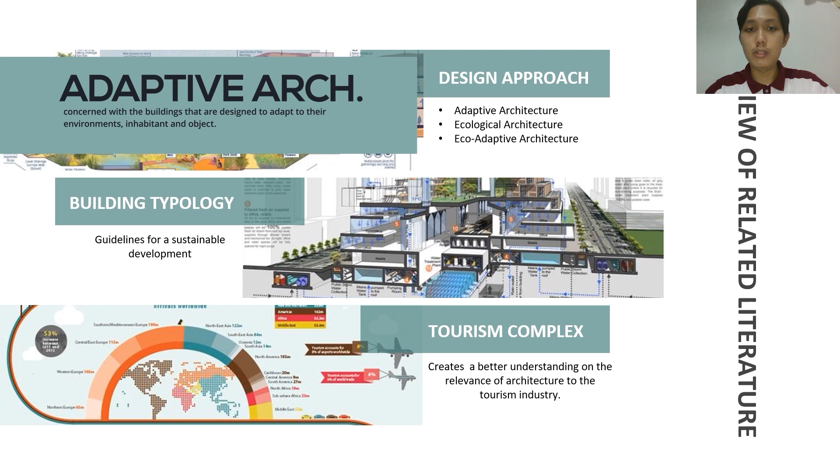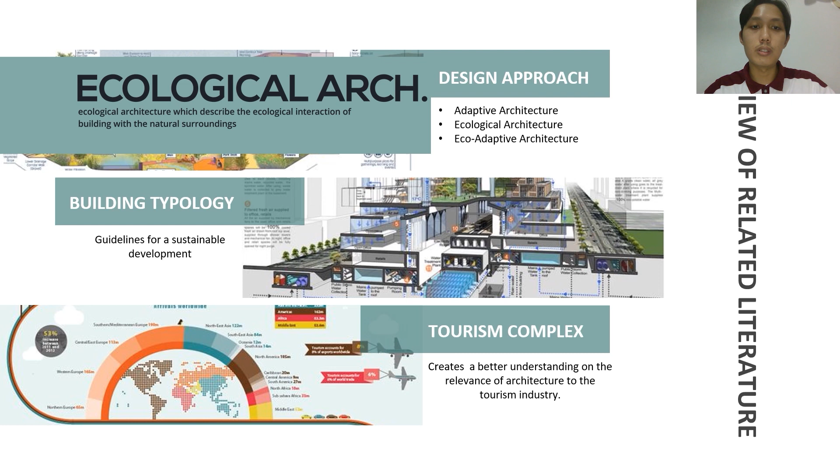The design approach deals with adaptive architecture, which is concerned with buildings designed to adapt to their environment, inhabitants, and objects; ecological architecture, which describes the ecological interaction of the building and natural surroundings; and eco-adaptive architecture, which deals with the cooperation between architecture and the natural environment to adapt to changes in their environment.

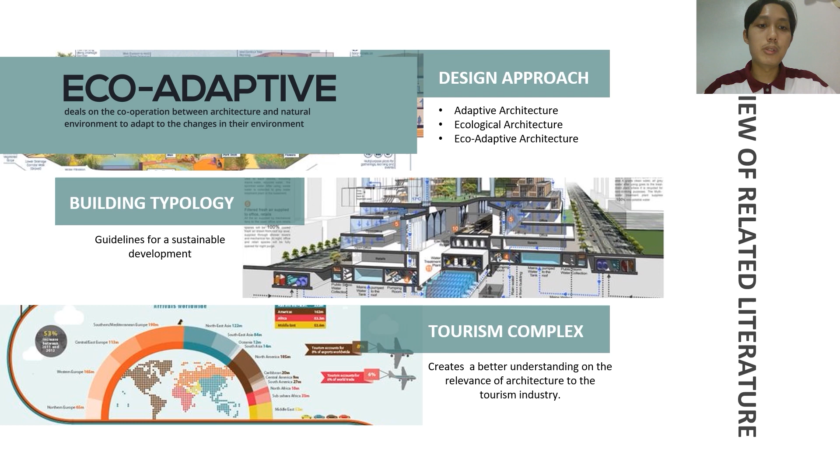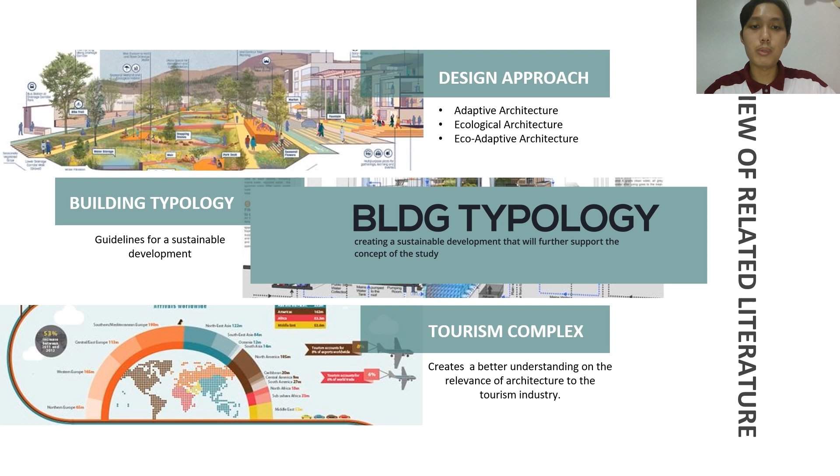Next is the building typology design topics, which are guidelines on creating a sustainable development that will further support the concept of the study. And lastly, the tourism-related topics, which create a better understanding on the relevance of architecture to the tourism industry.

For the local case study, the SM City Clark Complex offers a similar enterprise to the proposal. The development is composed of several buildings, including the Tech Hub, BPO Towers, Convention Center, Hotel, and the mall itself, which is connected by an elevated bridgeway. This bridgeway is used to highlight the landscape and the urban design of the development.

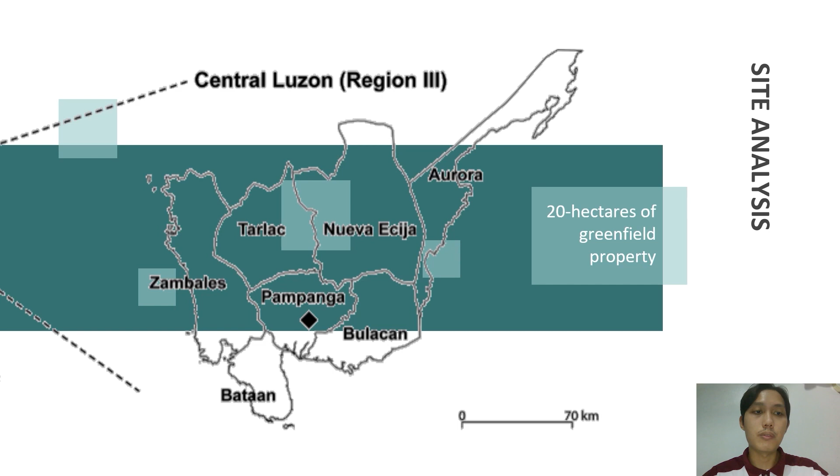The proposed tourism complex will be located in Region 3, Central Luzon, specifically in Mabalacat, Pampanga. The site of the proposed project will be in the Clark Tourism Enterprise Zone, a 20-hectare greenfield property located along the Prince Balagtas extension.

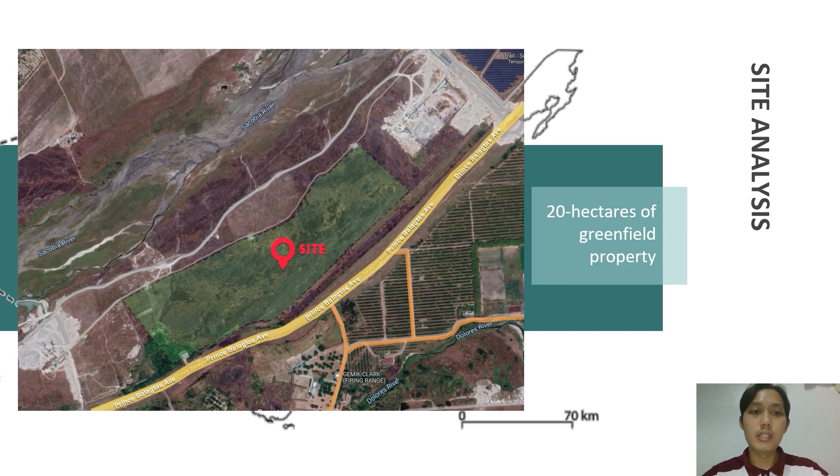Based on the initial analysis of the site, it is strategically located near an international gateway and major expressways, such as the Clark International Airport, Subic Freeport, SCTEX, Clark Railway, and Bulacan Airport.

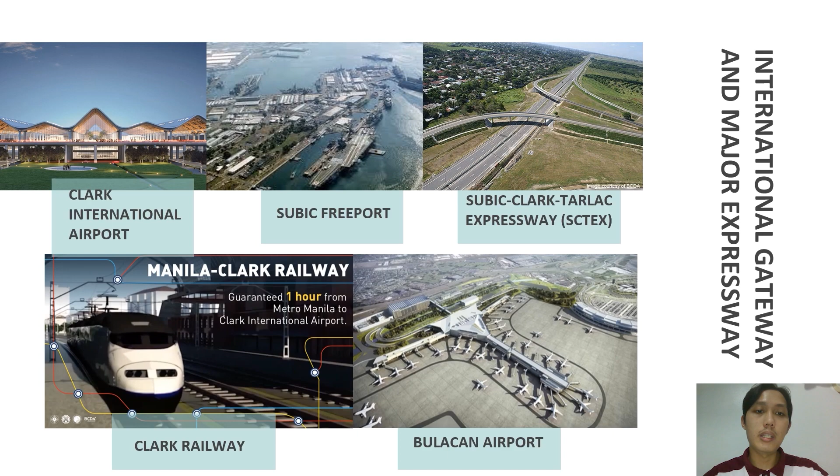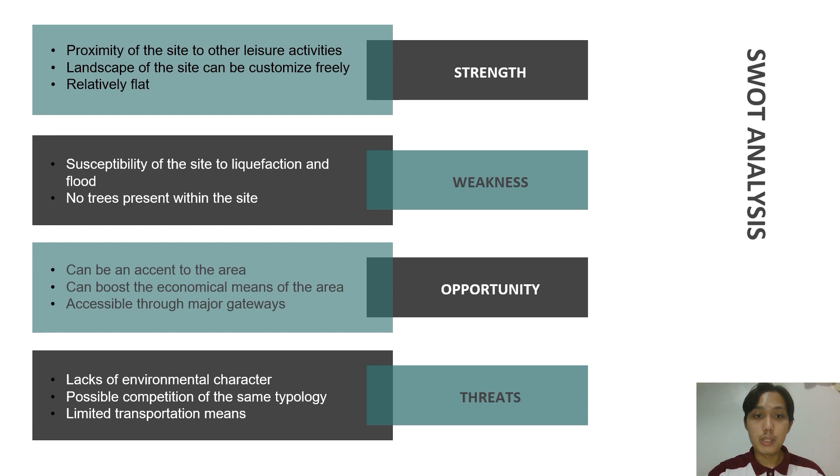The site is accessible also to major gateways. And lastly is the threat, which is the lack of environmental character, possible competition of same typology, and limited transportation means.

Moving on to the environmental system, for the foundation system, pile foundation will be incorporated in response to the natural hazard of the site. Framing system will be long span steel framing to have large unobstructed spaces. Floor framing will incorporate reinforced concrete.

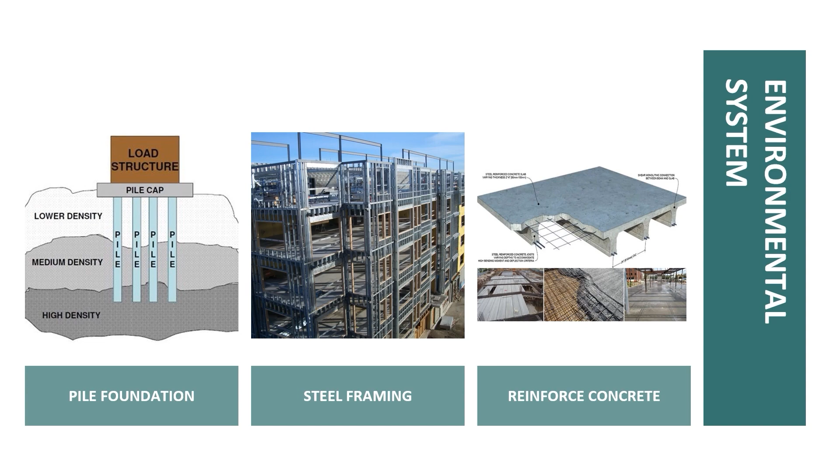For the electrical system, it will be provided by the PELCO 2. Alternative power supply like emergency power supply system and solar panel will also be incorporated to the development. In the mechanical system, centralized air condition and split-type air conditioning unit will be incorporated.

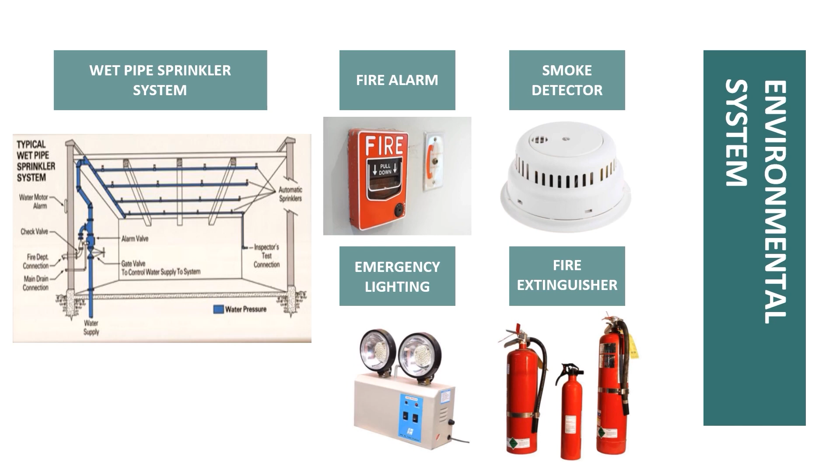For the firefighting system, it will be the wet pipe sprinkler system along with other firefighting components like fire alarm, smoke detector, emergency lighting, and fire extinguisher.

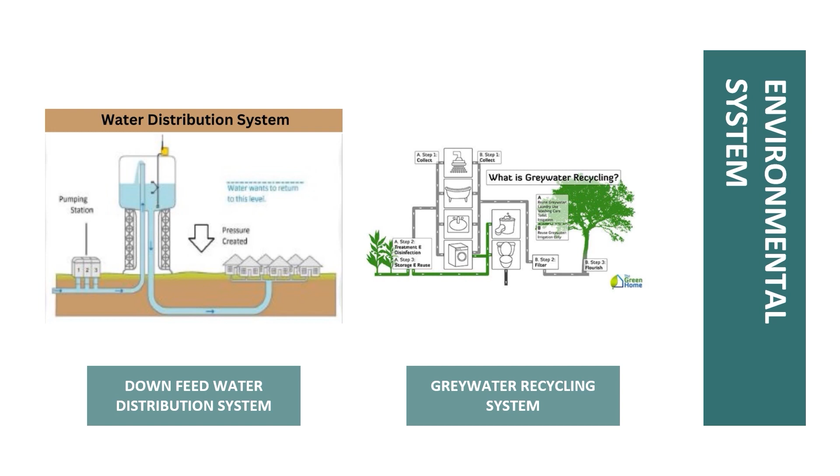For the sanitary system, it will be the down feed system for the water distribution along with the gray water recycling system. In sanitary drainage, the development will incorporate a 3-chambered septic tank, and for the storm drainage, it will be the rainwater harvesting system, permeable pavement, and vegetated swale to reduce the storm water runoff and increase the environmental quality.

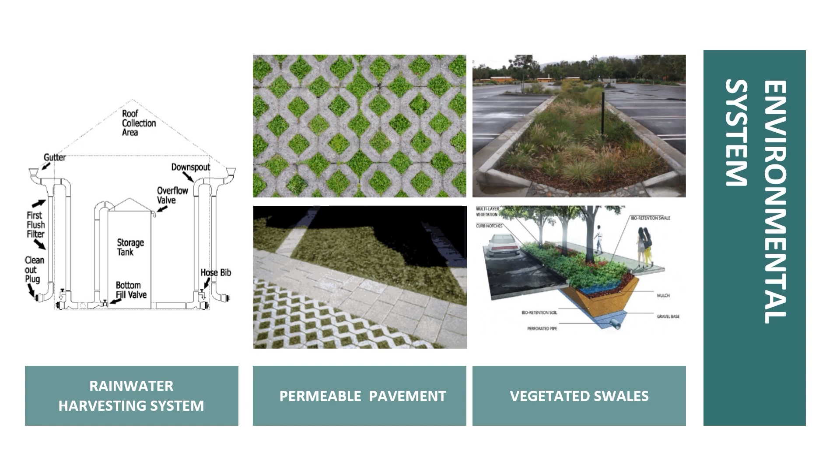For the waste management, waste handling and segregation will be incorporated to achieve a healthy and sustainable development. And for the security system, CCTV will be incorporated to the development.

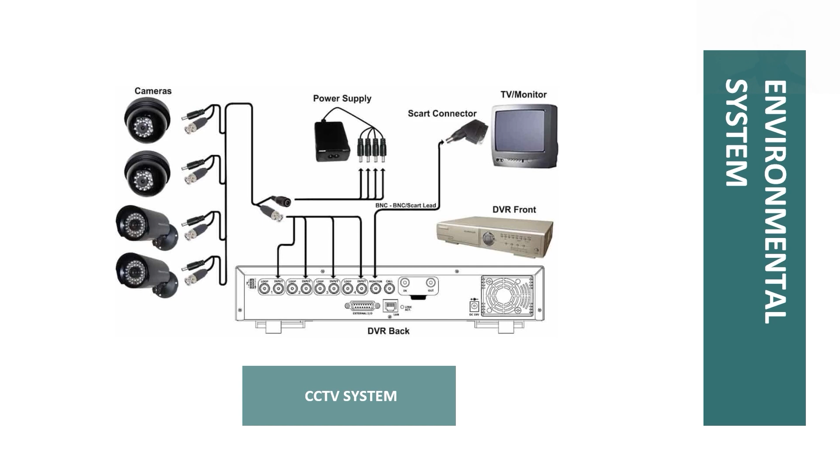Architecture is the art and science of making sure our cities and buildings fit with the way we want to live our lives. This is the design philosophy of Bjarke Ingels that will be implemented to the project.

This philosophy creates an understanding on how to deal with a variety of constraints, which creates a limitation on the design of the project. By defining the clear conflict between ecology and economy, new ways of ecological and economical development can be achieved.

In relation to this, the study will adapt the concept of creating a connection to architecture and nature towards a sustainable economy.

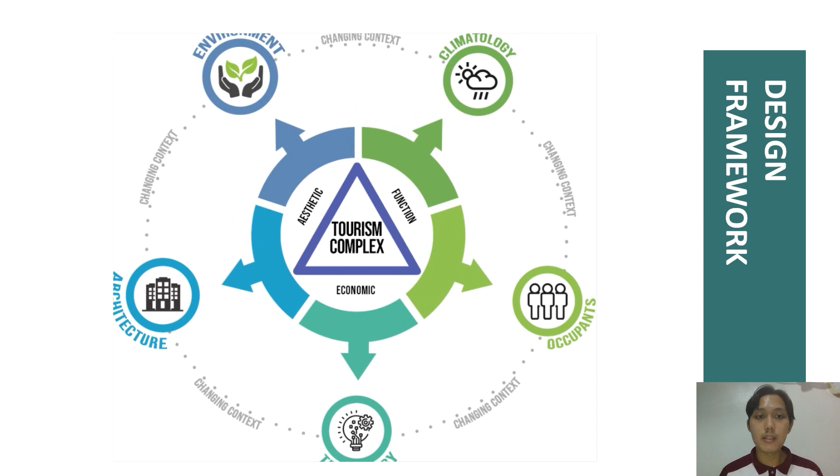Aspects like environment, climatology, architecture, technology, and occupants to the tourism complex will be considered in a changing context, and will be further supported by the 3 fundamental factors of architecture, which is the aesthetic, function, and economic, to attain equilibrium of appropriate balance to development.

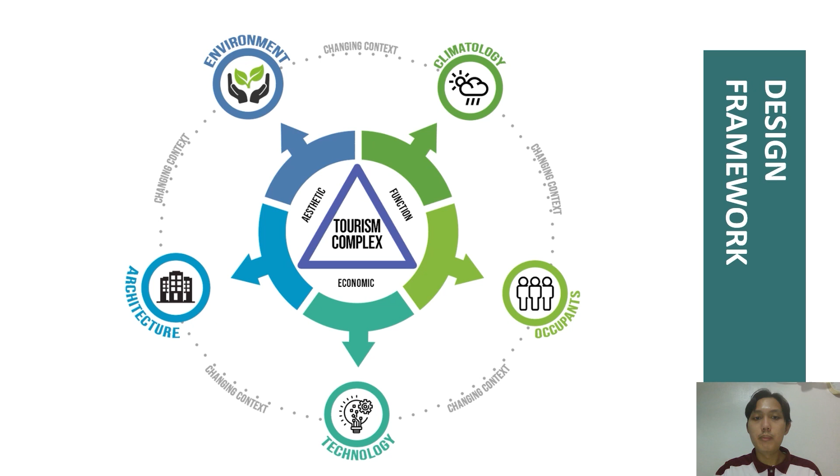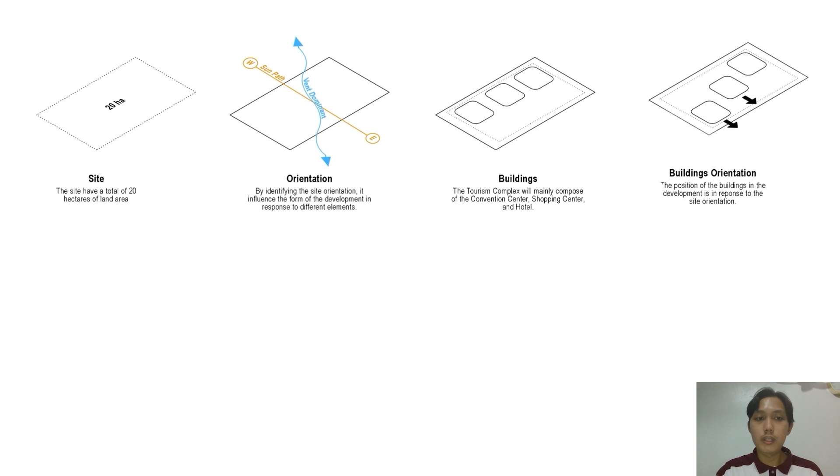Moreover, the form of the development will be a combination of subtractive and additive method in response to the buildable area of the site, distribution of spaces, access and connection, and blending with natural surroundings.

The proposed tourism complex project is a public-private partnership with the Tourism Infrastructure and Enterprise Zone Authority, or the TIEZA, Clark Development Corporation, or the CDC, and the Udenna Land Incorporated.

As per the computation, the project will have a probable construction cost of 10,922 million pesos. This is composed of land acquisition costs, building construction costs, mechanical and electrical service costs, fit-out costs, land development costs, furnishing fixture and equipment costs, professional fee, and contingency fund.

Based on the computed annual expenses and source of revenue, the return of investment will be 7 years.

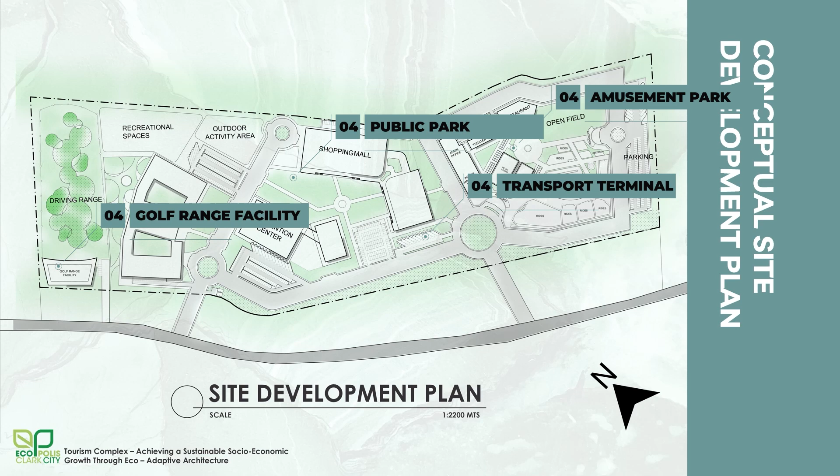Here is the site development plan for the Ecopolis Clark Tourism Complex. It is composed of 3 main buildings, which are the hotel, convention center, and shopping center. Supporting structures like amusement park, transport terminal, golf range facility, and public park are also incorporated.

Here are the flow of the development.

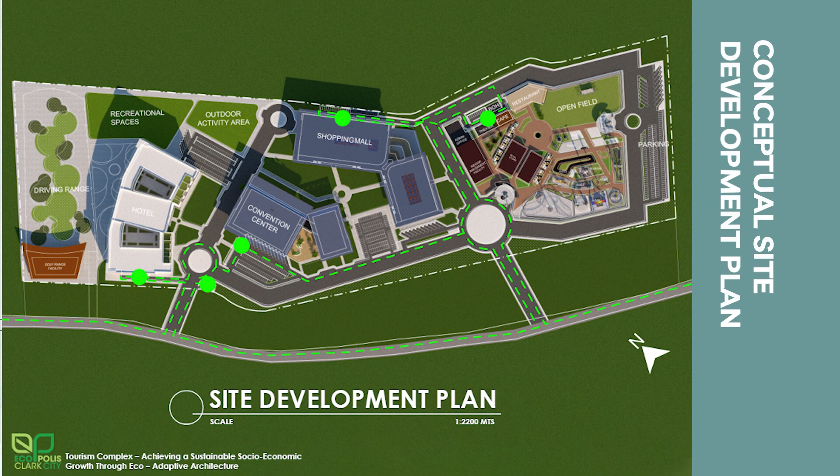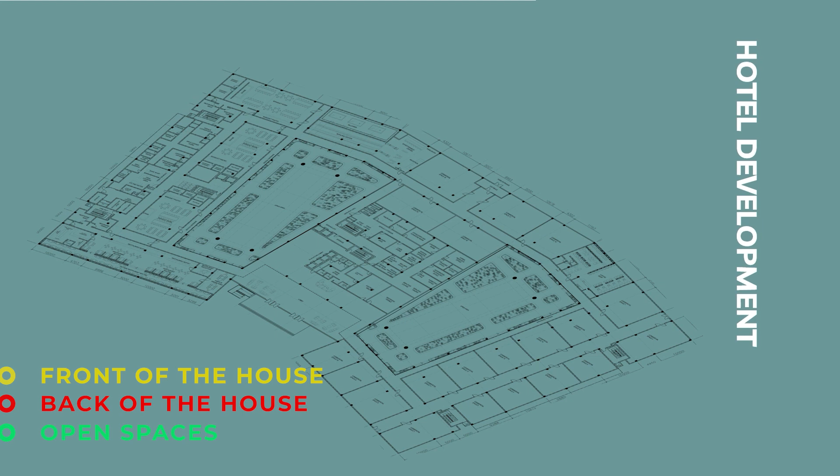For the hotel development, here are the zoning. Here are the flow for the hotel development.

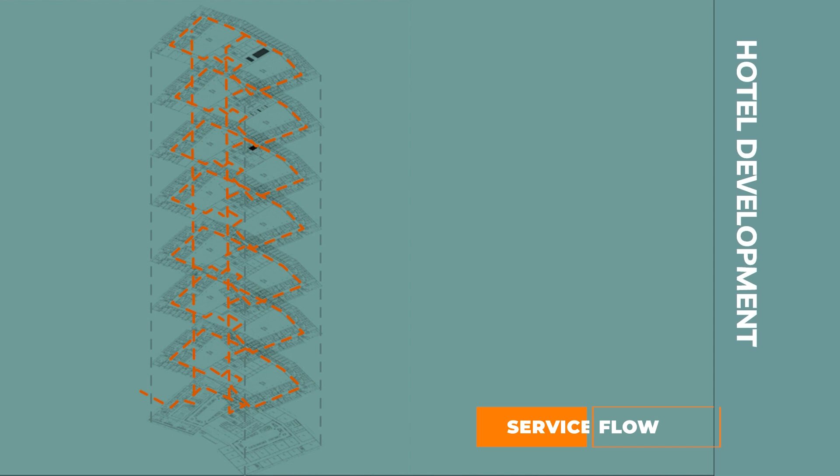And the perspective.